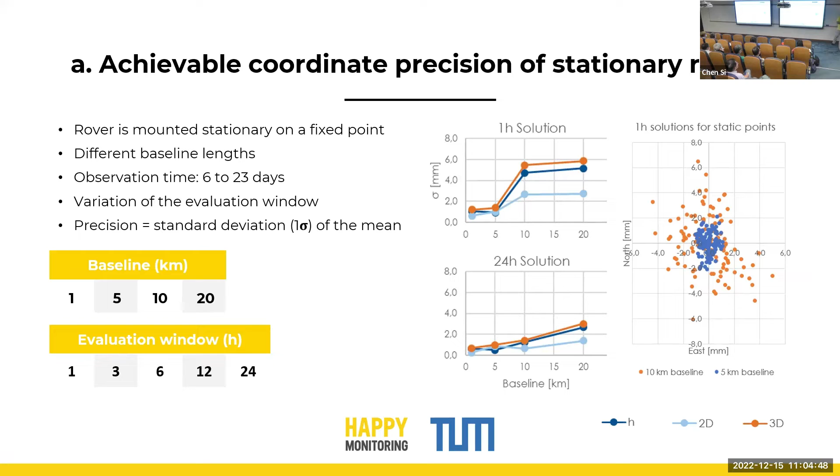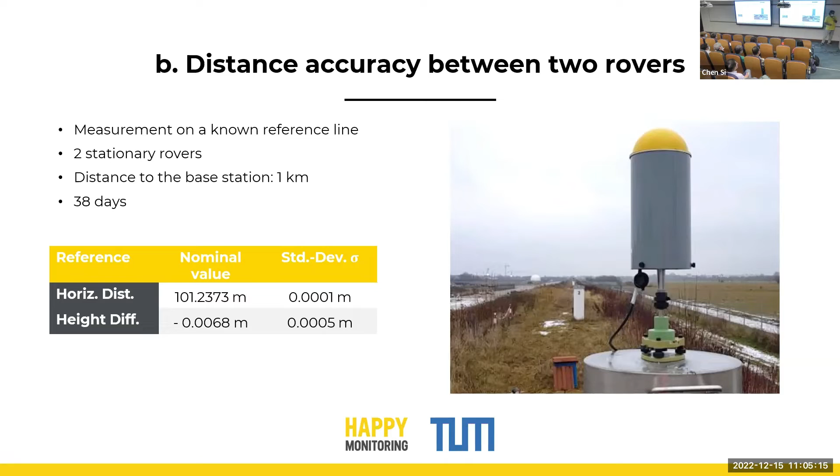Then they tested 2 rovers. These 2 pillars are the most precise distance measurement in Europe, measured by 3 universities together. They know the precision to 1/1000th of a millimeter. So we put our sensors, 2 rovers, here - and that is the distance. I'll show you this graphic, it's better.

Then they tested with a base at 1 kilometer and a base at 10 kilometers away from these 2 pillars. You can see with 1 kilometer, we have 1/10th of a millimeter, and in height 1 millimeter. That is the effect of Beidou - before this was not possible. With the new Beidou satellites, at 10 kilometers we are also at 1 millimeter.

That is important for settlement measurement - that not only the position is good, but also the height. Because when someone is a surveyor, you know 1 millimeter, 2 millimeters, more isn't possible - it's physically not possible to make an interpretation of 1 or 2 millimeters.

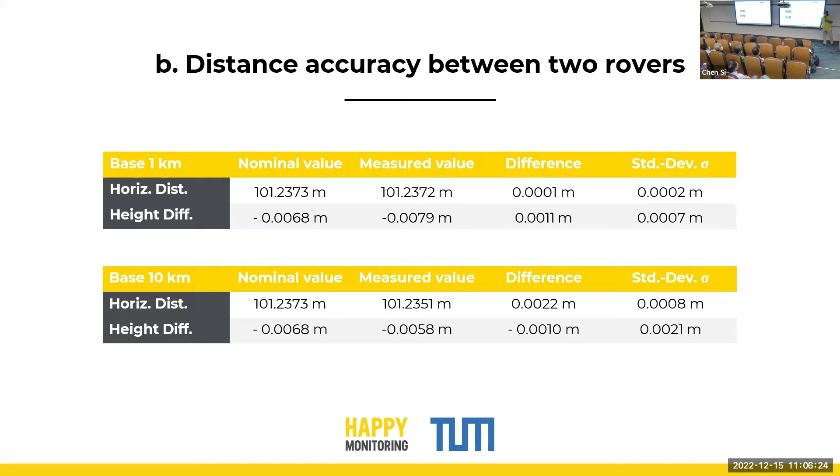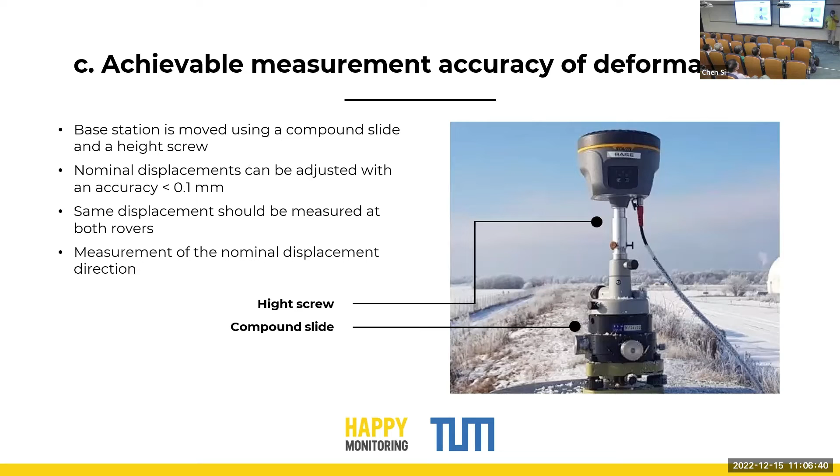And then they set up a rover - you see, it's very cold. And with a micrometer stage, they can move the sensor up, down, left, right, in all directions. And so in this graph, we see that the measurements fall into 1-2 millimeters, exactly matching the changes made on the micrometer stage.

Something happens because our algorithm works like this: when you have a very fast change of 5-6 millimeters, you will have no data for 1 hour, because the artificial intelligence must understand what happens, in which direction - whether we go up or down. So it tries to find out exactly what happens at the point. And you see here the average residuals are plane, 0.3 millimeter horizontal, 0.9 millimeter height.

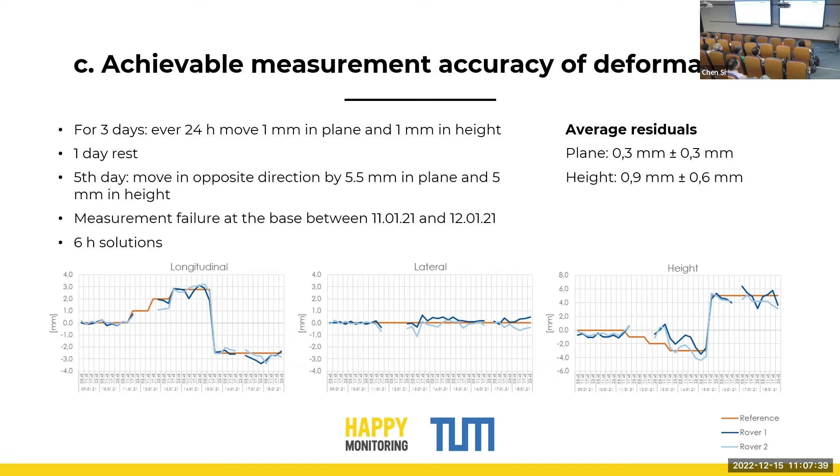Here is a resume about what we can achieve. On a 1 kilometer baseline, we are at about 1 millimeter in height and less than 1 millimeter in position. On 10 kilometers, we are at about 2.5 to 3 millimeters in height and less than 2 millimeters in position. These are data from the university, not from us. They made the test, and when you think you have to do a double high precision leveling, 10 kilometers forward and back, you will never achieve this result. This is better than your leveling.

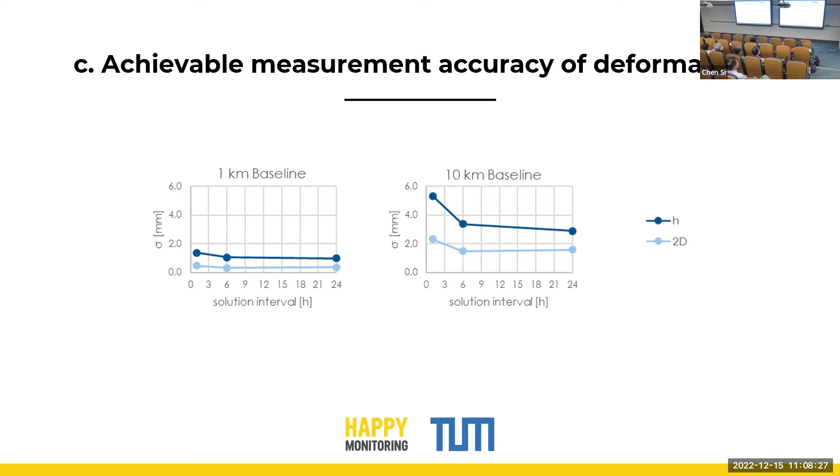Here is a graphical design about the distance and height difference. You can see here the solutions from the two rovers. One rover is stable, at about 2 millimeters, and the other rover is moving in the direction where the landslide is also measured by the other sensors. Important is the difference between the sensors - it's much higher than the absolute position of the point. When we take the distance between the two rovers, it's less than half a millimeter between the total station and our measurement. The absolute positioning is about 2 millimeters.

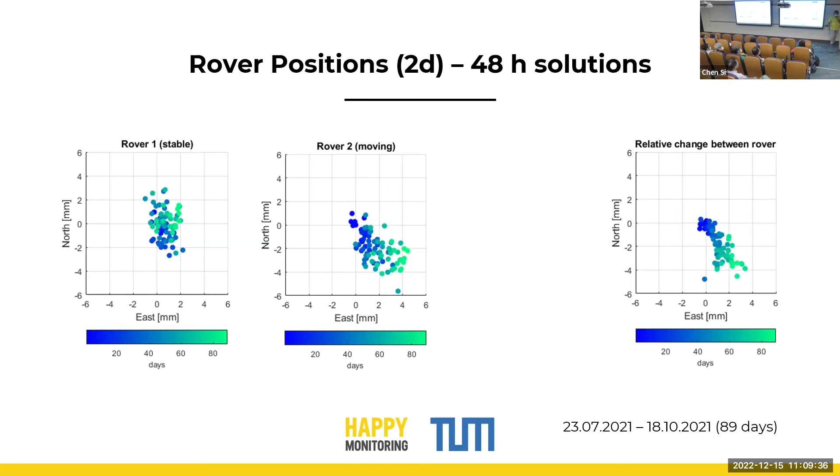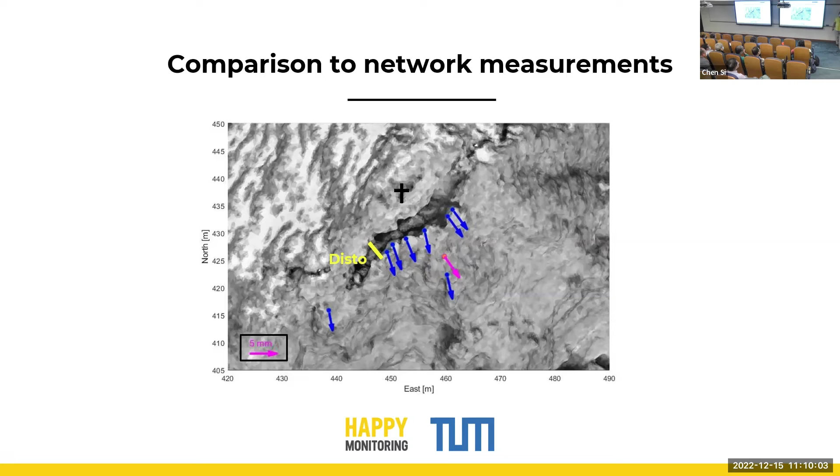And the conclusion from the university is that this permanent monitoring system increases the accuracy, depending on how long we can measure. The accuracy also depends on the distance between base and rover. But normally for 2 kilometers, we are below 1 millimeter, 3D. And that is really a new era of monitoring.

For the absolute positioning on the Hochvogel, they will do a next evaluation together with astrophysicists, because they need more information on why it works. When you read the books, it's written that this doesn't work - well, not possible. But now we've measured for 3 years, and in 3 years it's perfect. So they will do another test specifically about this mountain.

Now some cases of what we do. This one is nice because perhaps you know this mountain in Switzerland - it's the most famous mountain in Switzerland. Here we have a landslide, but the landslide is in the wood. The point is here - with these new sensors, with this new technology, you can also put the sensor in the wood. We need, in this case for example, 2 days for one coordinate, because it's clear that when we have wind, the trees are moving, so the system needs more time.

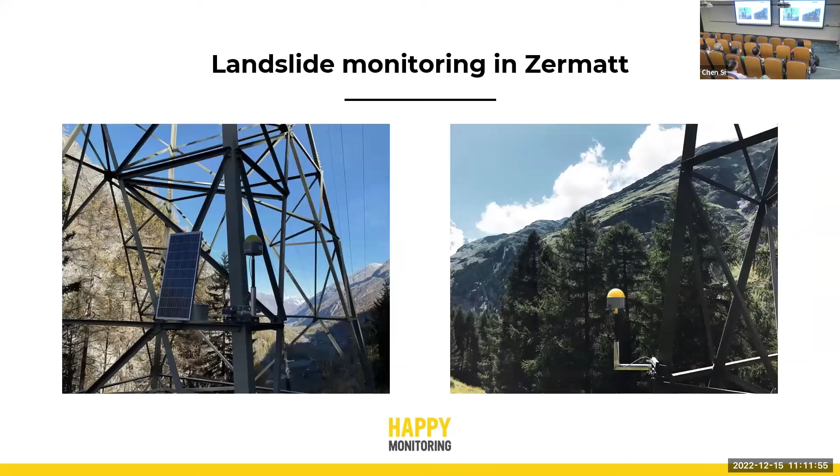But we can detect also in these difficult conditions. Here also the same - we can achieve about 1 to 1.5 millimeters of precision, 3-dimensional. This is the height - you see how smooth the height comes down, which means the slide is going down like this.

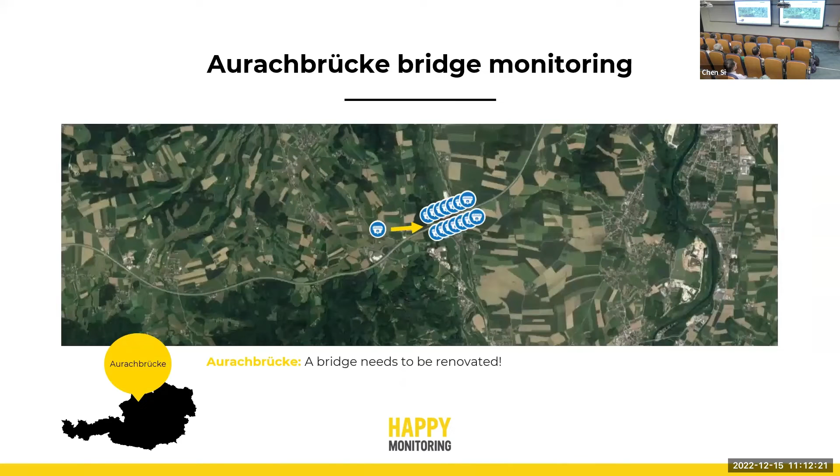Then another critical project - this is a highway bridge in Austria, where the engineer didn't want to put the sensor over the bridge. He needs to monitor the pillar. So we had to make this construction, and half the sky is cut away by the bridge. Especially in Europe, we have more satellites on the south side, less on the north side. So the problematic point is here, on the north side - I have fewer satellites and half the sky is blocked.

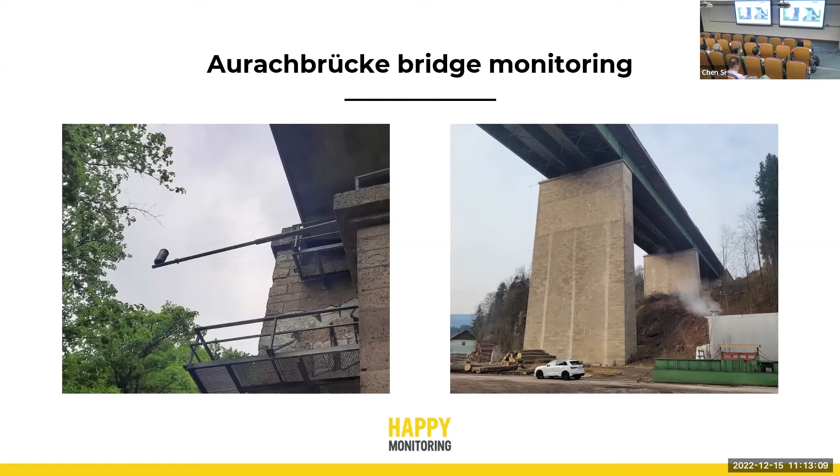And also here we now use version 4 of the calculation, which has a high value of artificial intelligence inside. We achieve about 2 millimeters, 3-dimensional, under the bridge. That can help here in Hong Kong where we have the problem of buildings - you don't need the full sky open for monitoring. We can also, under difficult conditions, find a solution when we have time. It's not for fast monitoring, it's for permanent, long-term monitoring.

Then monitoring that is also a high-risk project in Europe - these dams. In Austria alone there are about 70,000 of them. This is when there is high water in the mountains, rainfall, and you have a landslide that blocks the slide. I think you will have that also here in Asia, or surely also in Hong Kong. These walls need to be monitored, because when they fall down, the village on top would be destroyed - they are all for safety. We have these dams on the water flows from the mountains, and normally under very difficult conditions. There, in the mountains, in a valley, you have things, and normally there's no internet - that is another problem.

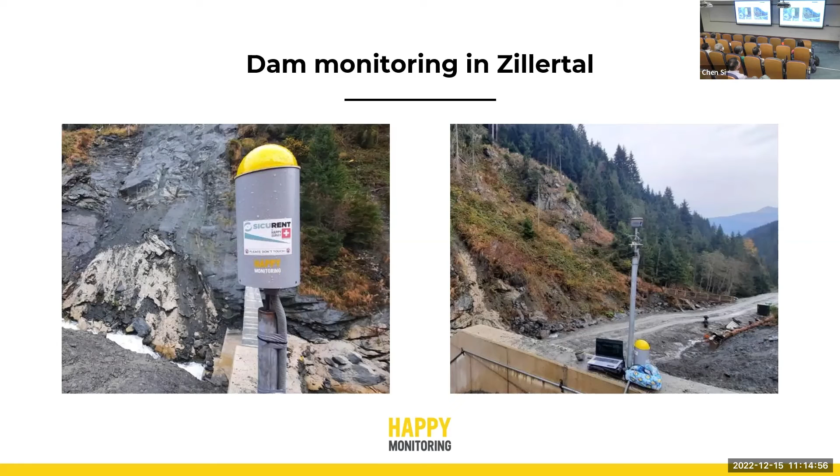Yes. Now we come nearer to Asia. This is Jakarta in Indonesia. Perhaps you have heard about the problem that Jakarta is going down into the sea, the subsidence. And here we have tested for about 3 years now, because the problem of Jakarta is the distance. That is, the whole city is going down, and the next fixed point is 50 kilometers away.

So we have adopted here a technology where we have a base station in the subsidence area and a 0 point outside. Then we use the results like leveling. This measurement is the backsight, and this measurement is the foresight. So we can determine the height difference between the 0 point and this point.

And in this case, in every port, the biggest problem is interference. When you work on a port, the YSF can talk about that, and the CEDD also. You have so many radios, Doppler radars from the ships that disturb the satellite signals. So you have to change the technology totally in these regions to achieve high precision results. That was in the last 2 years, I think, the biggest work that we have done for Jakarta and for Hong Kong, to find a solution to these interferences near a port.

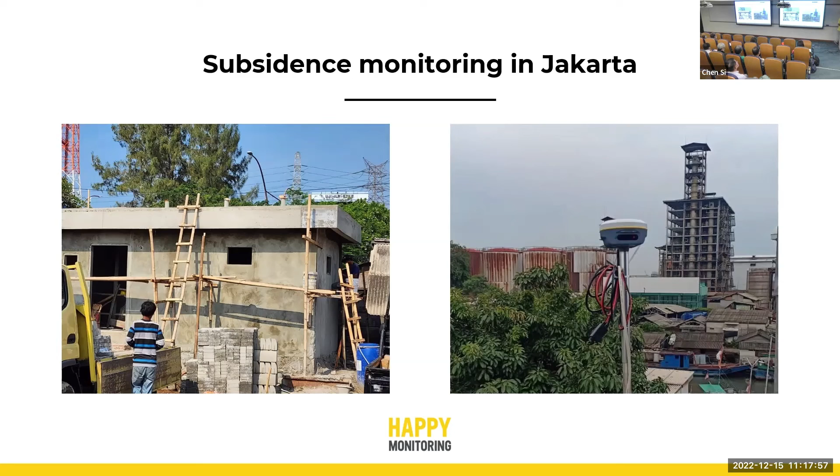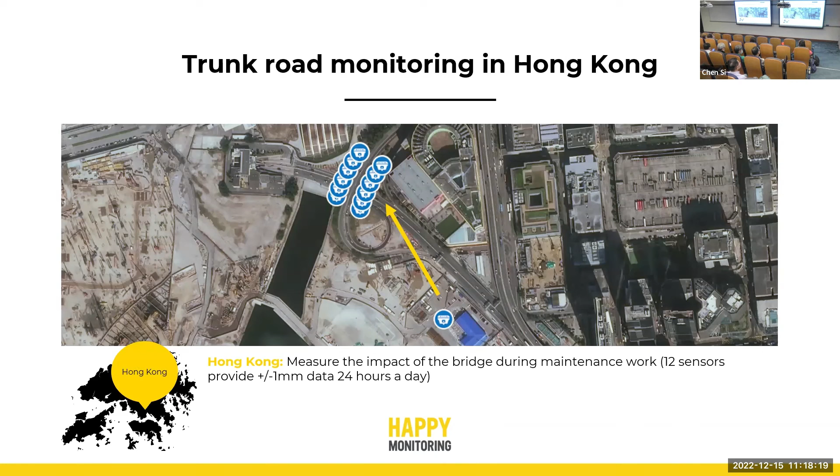Now we are in Hong Kong. When we began with YSF, the first project was Trunk Road, a bridge monitoring, and it worked perfectly. It was so nice. We were all lucky, results were good. And we said, okay, we go ahead. That is a picture of the Trunk Road. But then we began monitoring here.

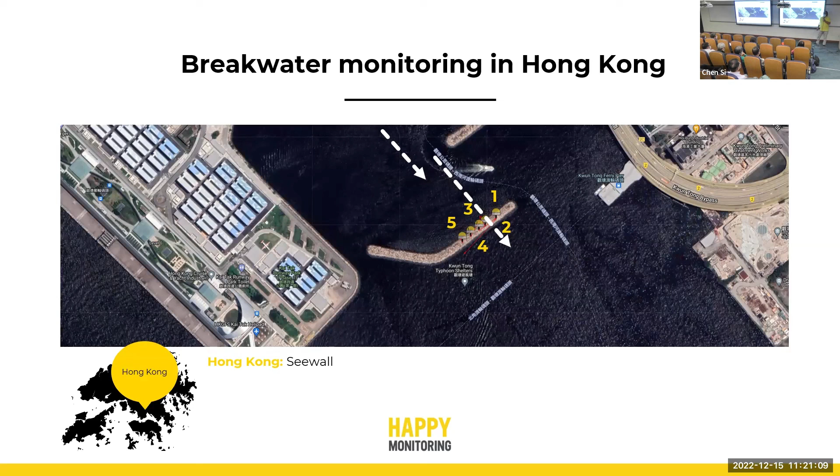And so that is Happy Monitoring. What we can do: we can go long distance, high precision, especially settlement. Now we can monitor the height with millimeter precision.